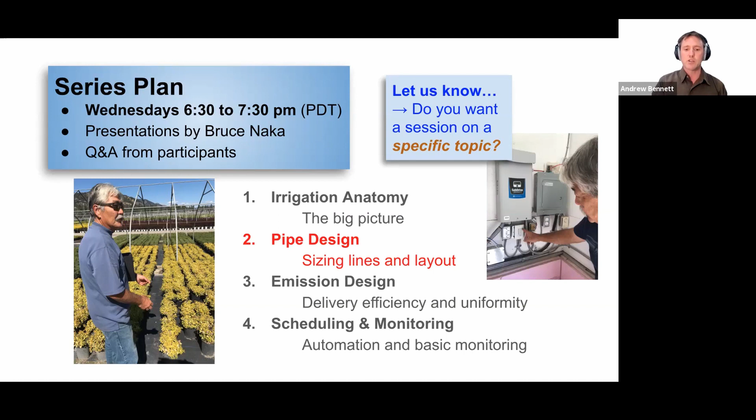Today we're really focusing on pipe design, sizing main lines, sizing your whole system, laying out laterals, and thinking really carefully about hydraulics, how pipes work, how water flows in pipes, and the considerations you have to make to ensure a uniform distribution of water, which is what we're going to cover in the next session when we look at sprinklers and drip emitters and try to think about how to get that water evenly spread across your field.

I'm going to make one caveat before I hand it over to Bruce. There's a lot of complexity in tonight's presentation, a lot of tables, a lot of numbers. We've tried to simplify it, but there's really no simplification of some of these concepts. So if you're having any trouble at all, please don't worry. Probably lots of other people are in the same boat, so don't hesitate to ask a question or ask for clarification on any of these. Bruce is going to really walk us through it one step at a time. So over to you, Bruce. Thanks very much again for being with us tonight.

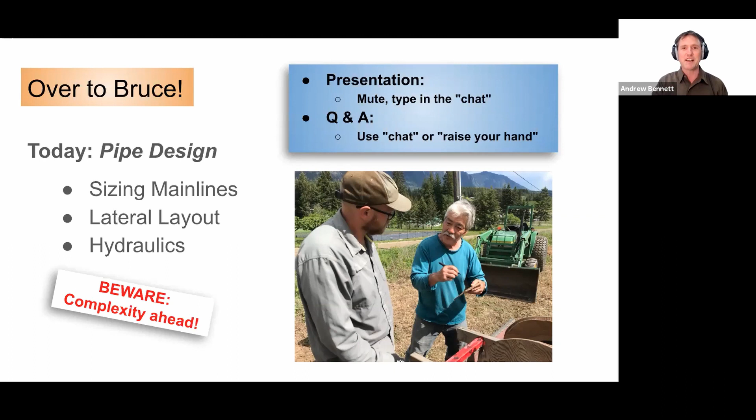Thank you very much. Thank you, Andrew.

So today's topic is about sizing of lines. It's actually sizing of all of the apparatus that you would need when you are planning your irrigation system. Obviously, your pipe sizes are one of the most relevant of these things, but we're going to discuss a lot of the different parts of your irrigation system that you should be making decisions on size for, and some of the various characteristics that you would require.

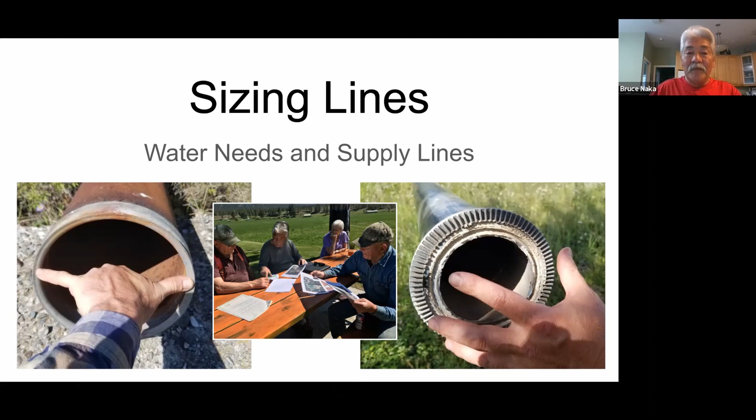We have everything at our point of connection. Obviously, if you're at a pumping system, you have to put some thought into the size of the pump that you have, and that pump cannot exceed what you have available. From that, you're going to trunk into your main line of your system, and your main line is one of the primary things we're going to be discussing today. What is the size of the main line that you're going to have? What is the type of material of the main line that you will be using? Obviously, the fittings that go along with it. And following that, we will be looking at the lateral piping, which also has to be sized.

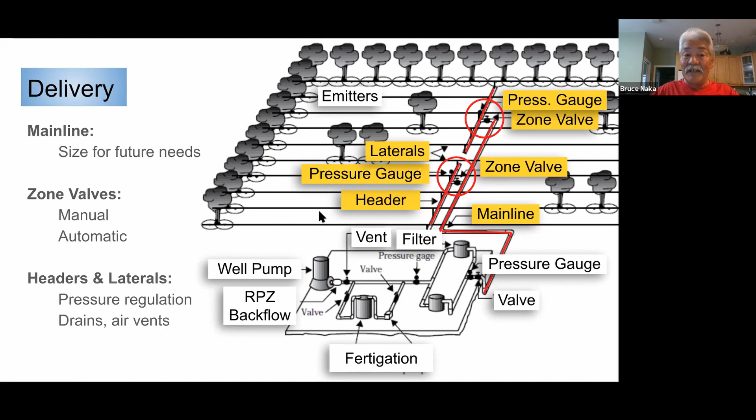It's going to tell you your peak flow demand for the area we were looking at, which was Creston. The peak ET for that area is 5.5 millimeters, or 0.22 inches per day. So that's the amount of volume we're going to need for water, 5.5 gallons per minute per acre. Depending on the size of acreage you have, you would multiply that. If you had 10 acres, you would be allowed 55 gallons per minute of water.

We also want to look at various other things besides the size of the field. We're going to look at what your crop is, since various crops have various water requirements. We want you to be able to change crops and still have enough water to facilitate irrigating it. Climate change obviously has an impact, and we want to talk about future expansions and how that will impact you too.

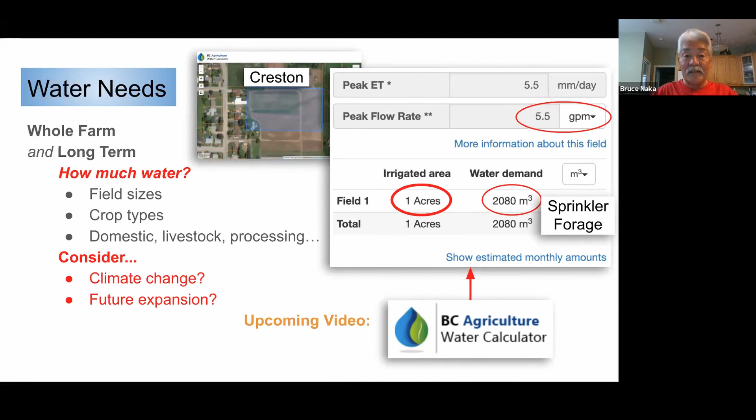So on the slide before, we had the factor of 5.5 gallons per minute per acre. On that 10 acres, he would be allowed 55 gallons per minute of water. If he's only going to be irrigating 5 acres, then he's only going to be requiring half of that amount of water, or 27.5 gallons per minute.

So one of the first things you have to do is have some long-term thinking on this. If you have 10 acres of water available, and in your mind you don't think you'll ever exceed the 5, is it wise to just size that mainline for the 27.5 gallons per minute? Or should you keep the 55 in mind? Even though pipe has gone up significantly lately because of our world situation, it's still relatively inexpensive in the scope of things. So the difference between a 2.5 or 2-inch pipe versus a 1.5-inch pipe is not that significant, and the long-term value of increasing that size is well worth your while. You'll thank yourself someday way down the road.

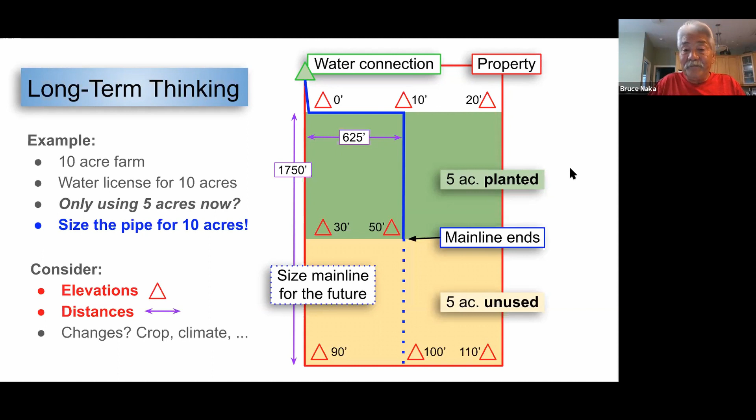So the complexity in a situation like this is you have to look at wherever your water source is coming from, and how many acres maximum you're going to irrigate. The next thing you look at is whether you're going to be irrigating in a lot of different areas at one given time, or if all the water is going to go to one specific point. In other words, in this big picture, if we had 100 acres of land and were using that 5.5 per acre, you would have 550 gallons per minute of water.

Well, the size of the piping that you would require to have that 550 gallons per minute at the very end of the field would have to be large enough to facilitate that. So we would be talking about an 8-inch main line in order to get the water to that point. However, if you were feeding from a given location and then split, using half the water on either side, you would be able to reduce the size, and may be using some 6 and 4-inch piping, for example.

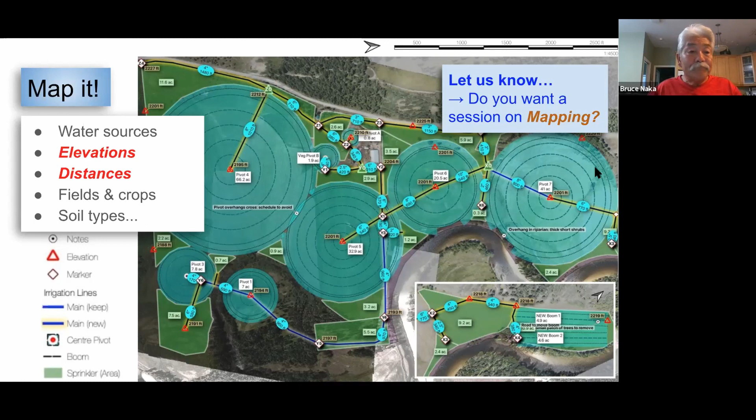Engineering specifications on a majority of piping should not exceed 5 feet per second. Why? When you exceed 5 feet per second of volume going through a pipe, you create a situation where, if you've heard of water hammer or water surging, those things occur when water changes direction. When water is going in one direction and a valve closes quickly, it can go back 2.5 times as fast in the other direction. So we want to keep our velocities under 5 feet per second. There are charts that will show you what your various velocities are in the piping, and that's going to be our governor to determine the size of the piping we're going to use.

Obviously, you have friction loss in that pipe, caused by the water movement through it. So the diameter of the pipe and the type of pipe are important. There were old slide rules, when I started out in this business, and we had to dial in the coefficient of roughness of the pipe. Obviously, if you had an old steel pipe, perhaps rusted, the water is not going to be able to flow all that smoothly through it.

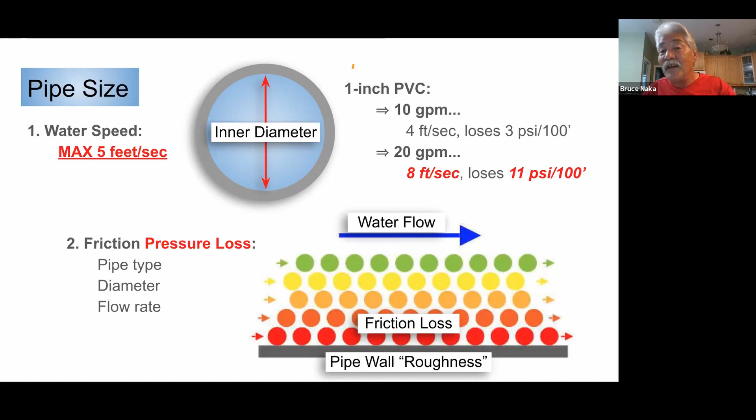An example: the inner diameter of a 1-inch piece of PVC pipe, schedule 40, if you were flowing 10 gallons per minute of water through it, you have a velocity of 4 feet per second and a pressure loss of 3 pounds per 100 feet. You'll see that on a chart in a few slides. If you were to go to 20 gallons per minute, your velocity is 8 feet per second. So you should be looking at upsizing your pipe to maybe 1.25 inches because of that velocity. You're losing 11 pounds versus the 3 at 10 gallons per minute. Next slide.

Now you're going to see pressure ratings. All piping have pressure ratings. It gets confusing on PVC pipe, for example, because you can buy anything from a class 63 pound, which you don't see. That's usually just for water transfer in a very low situation.

Your wall thickness is very minimal, to a class 125, 160, and 200. For the difference in pricing, a majority of piping that we use today would be of the class 200 variety. In days past, people used to use class 125 and 160, but the difference in cost for that extra bit of meat that you're going to get in a class 200 pipe warrants keeping it that way.

The burst pressure, which is important because you shouldn't be anywhere near it, you can see burst pressures on that pipe. So if a pipe is rated at 200 pounds of pressure, it's going to have a minimum of 1.5 to 2 times that before it'll burst. But we don't want to ever get into that situation.

So class 200 pipe, you can know that it can safely operate up to 200 psi, but keep in mind that water hammer - if it's 2.5 times going back the other way, your 200 pounds of pressure would be over 400. So keep that in mind.

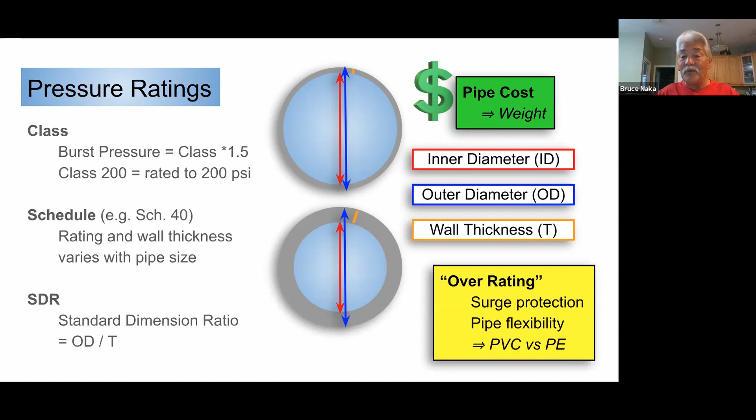Okay, so the water hammer that we're talking about - how does that happen? When a valve closes too quickly. In a lot of electric systems, there are relatively fast closing valves. There are ways around it. You can get some valves that are slower closing, but inherently, an electric valve is going to be a lot quicker closing than, say, a gate valve or a ball valve.

Ball valves actually, on a main shutoff, I do caution people about using them because a lot of people think it's awesome that you just got to quickly turn a big handle and your water's on and off. But you're creating a water hammer by doing such. And I've seen pipes blow apart very quickly by doing that in high pressure situations. Water rebounds fast, 2.44 to 2.5 times. So here you can depict that where you show the valve open, and depending on how quickly you close that valve is going to create a water hammer.

So a valve on a mainline, an isolation manual valve, there are some benefits to having to turn a handle on a gate valve because it's going to be a lot slower closing valve.

If you're using a valve to throttle, and I did go over this at other times, gate valves should not be throttled. Why? Because a gate valve throttled is going to prematurely wear your seat out on your valve, especially if you have some turbidity in your water, you have some sand and grit. It's going to break down your seat. When a seat goes in a valve, you could change all the gates you want to, but it's still not going to shut properly. If you want to throttle a valve, best valve for that is a globe valve. The ball valve will work for throttling, but the globe is the one that is specific for that purpose.

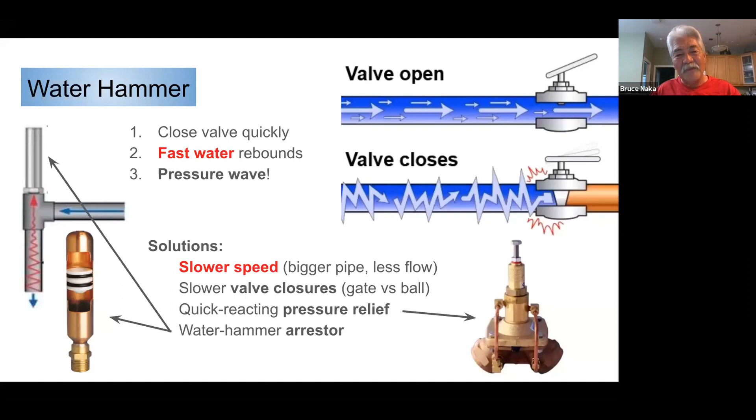You can get some other arresters that are shown here. They go online, and it's going to just take the buffer of that. In irrigation systems, you don't often see them. They're used more in smaller systems a lot of the time, in basements, houses, and the like.

Okay, next slide. Just some other items I wanted to talk about a little bit on a main line. We've discussed a lot about air relief valves, and it's only over the last 20 years or so that air relief valves have been consistently put into irrigation systems. Prior to that, they weren't put in, and there was a lot of damaged pipes that were created by the air that had built up in the pipes.

Every high point as you change your elevations, you should have an air relief valve on a system, and every 1,000 feet as a rule of thumb is a good idea to have a relief valve or an air release valve. Drain valves on the low points of your main line are going to ensure that your water evacuates out at those points. Any lower pockets, even if you drain it, water can collect in those points. And if more than half of that pipe is full of water at that low point, it's going to break. So that's a great place to put a drain.

Drain valves, if they're really deep down on the ground, you need a method to get at it. The one on the left is an expensive valve. It's a T-handle valve, but you can get a curb rod that goes onto that, so they're a lot easier to get at, to use as a drain valve. With a gate valve, you can make a very simple two-prong type of key that'll open those under deeper applications. Ball valves are a little bit more of a challenge.

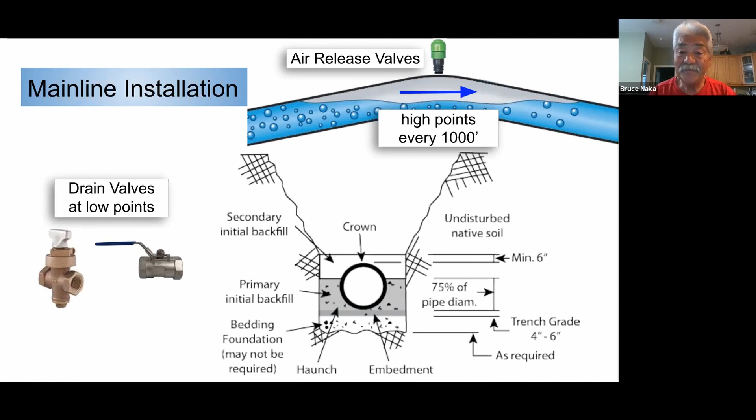Okay, I talked about boring you with some friction loss charts. Here's how we're going to determine the size of this piping system. So it's the farm in Creston, still 10 acres, with a 5.5 gallons per minute per acre allotment. So that's 55 gallons per minute, the amount of water we're going to be sizing their piping system up to. If you were to look at this chart, a 2-inch pipe—

Now you have to be very careful—this is where it's going to get a little bit confusing. I suggested that in piping on a main line, I would recommend a class 200 or a schedule 40 pipe. A 160 could be acceptable if you had 100 pounds of pressure, but I would still probably recommend going to 200-pound pipe. Based on that, the wall thickness on a schedule 40 pipe—keep in mind your OD, your outside diameter, of all PVC pipes and HDPE pipes are always consistent.

A 2-inch pipe, for example, has an outside diameter of 2.38 inches, and that's consistent. But what changes is your inside diameter. For example, that Class 160 or Class 200 pipe has a wall thickness substantially less than a Schedule 40 or up to a Schedule 80 pipe. So the thicker the wall, your outside diameter stays the same, but it means your inside diameter is going to get smaller.

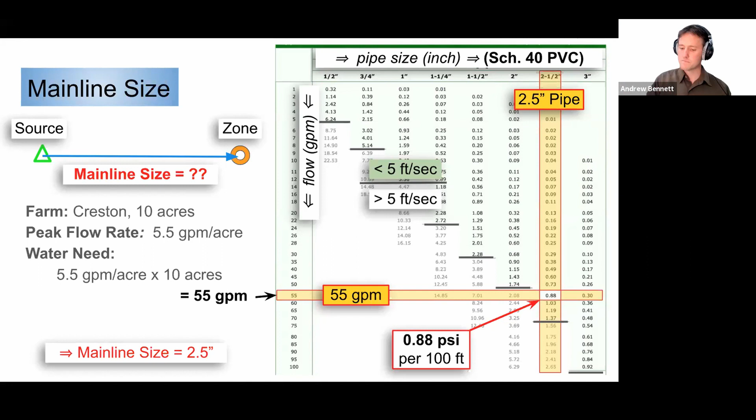But if we're in a situation where we can't afford to lose any pressure, because let's say we need 50 pounds at the end of the line, and we have friction loss, maybe other losses in fittings and the like, then you might want to go to a larger pipe so you don't lose that extra pressure. Let's say you needed 50 pounds of pressure at the end of the line but only had 55 to begin with, and it's flat or going uphill. If it's going uphill, there's nothing you can do about it. But if it was flat, depending on how long that line is, you may lose more pressure than you can afford, and so you wouldn't have the 50 pounds at the end. Hence, you go to the 2.5-inch pipe, and you're able to gain that pressure back.

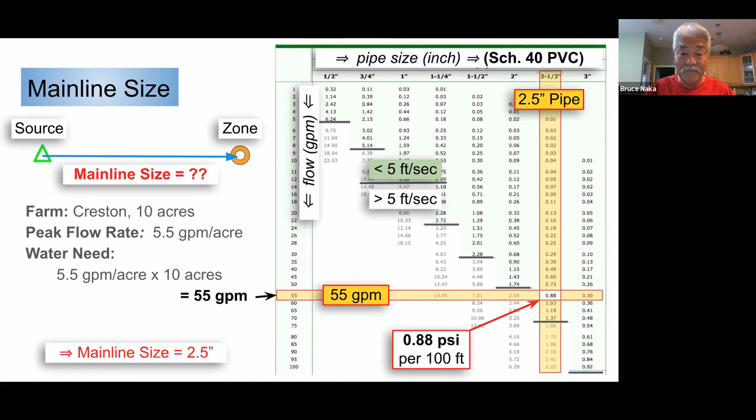Now, this is a myth, and I've heard it a lot—we heard it on our Kootenai trip quite often. That's the fallacy that people think if you put your thumb over the end of a piece of hose, you're creating more pressure. You're creating more velocity and water speed, but you're not creating more pressure.

The fact is that pressure loss occurs from friction, and the longer the distance you have and the smaller the hose, the more friction you have. If you have a larger piece of pipe, you can have less friction loss. The volume may not be as fast because it has a larger pipe to travel in, but we're not going to be losing the pressure. So slower water means less friction loss with the same flow and the same pressure, while faster water means more friction loss—that's where you get the velocity, like a Venturi effect. That's why it seems like the pressure is heavier, but it isn't.

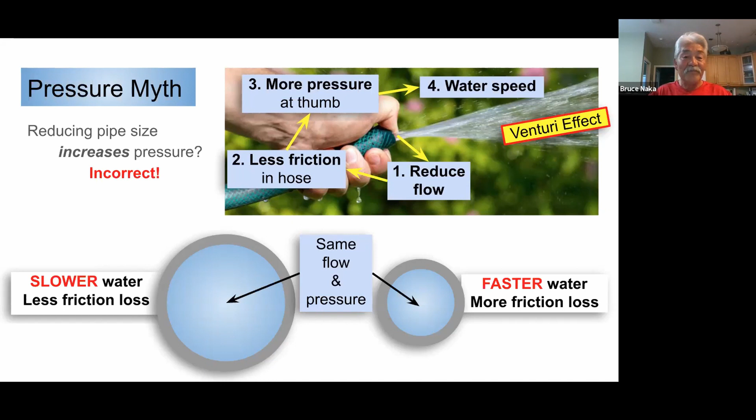Okay, now I want to go over this. Here we're sizing out a main line. We have a flow in the main line required of 55 gallons per minute. At that valve, we require 50 pounds of pressure, 49.5 it says here. At the source, we have 60 pounds, so we have 10.5 pounds of pressure variance between the source and our zone valve. The lineal distance of the line we're going to be putting in is 1,000 feet. We said in this case we're going to use a 2.5-inch diameter pipe, and elevation is 500.

What does that mean? It means that you're in a level terrain. We have 500 feet at each location above sea level, so there's zero rise or drop in elevation.

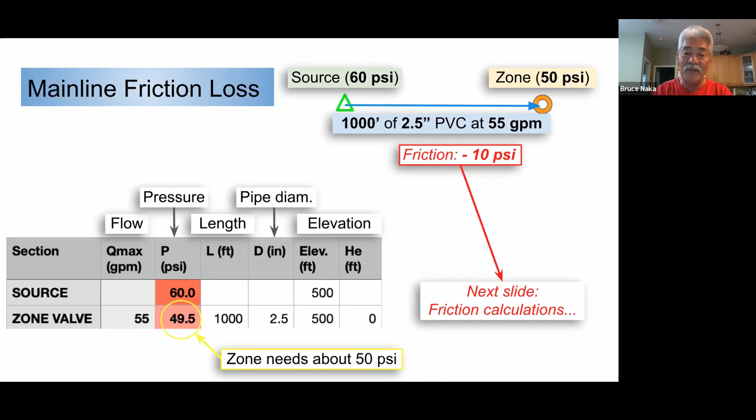So the next slide is going to look at friction losses. At 55 gallons per minute at our source, over the 1,000 feet, using the 2.5-inch pipe with zero elevation change, we have a friction loss of 0.88 pounds per 100 feet of pipe in 2.5-inch pipe.

We had 1,000 feet, so if it was 0.88 per 100 feet times 10, that gives you your loss in 1,000 feet. So we're going to lose 8.8 pounds of pressure in that pipe over the 1,000 feet of distance. Fitting loss, this is...

20 to 25% is the maximum people will use for that. On average, I usually look at a factor of around 15%. It's a gut feeling you have on that, but it's based on the amount of fittings. If you have a whole series of elbows and T's on a line, but especially 90-degree elbows, or a lot of brass gate valves on the line, we might be looking at a 20% fitting factor. But if it's a straight line with very few fittings, you might only have a 10 to 15% factor. It's always good to err on the high side. So I would say the 20% is a good judgment figure there.

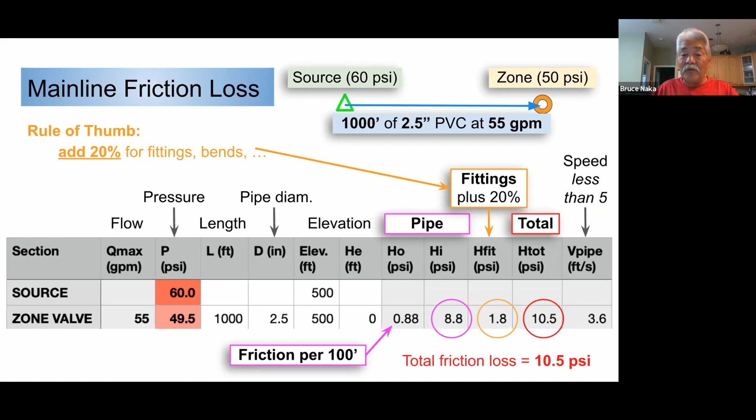So what we're going to do is take the 20% of the 8.8 pounds of loss of the main line, and that gives you 1.8 pounds of loss. Then you have your 8.8 pounds that you're losing in that 1,000 feet, so you have a total loss of 10.5 pounds. The velocity of that 2.5-inch pipe at 55 gallons per minute is 3.6, so far under our 5 feet per second limit. And we're going to have a total friction loss of 10.5 pounds.

So in that case, the 10.5 pounds that we were losing off of that 60 that was there, we were at 49.5 psi.

Now we're going to throw another monkey wrench in here. We're going to put some elevation change in here. So from our source of water to where our zone valve is, we now have a 50-foot rise in elevation. What does that mean? It means we're going to have an extra 50 feet of lift that we have to overcome, so we're going to be losing more pressure because of that extra lift. That extra lift is going to cost us an extra 22 pounds. So what that means is from your source, you would actually need 82 pounds in order to give you the 49.8 pounds at your zone valve.

How I usually suggest working out friction losses is the same way we calculate the size of a pump. We start at our source and we calculate out all our friction losses, all our elevation changes, all of our losses that occur in the line over that distance.

And then we determine at the very end of the line, if we're running a wheel move, a traveling gun, or a solid set sprinkler system, what does that last sprinkler head on that zone require to operate properly? If it's a brass impact sprinkler head, 3/4 inch, you probably want about 40 pounds of pressure.

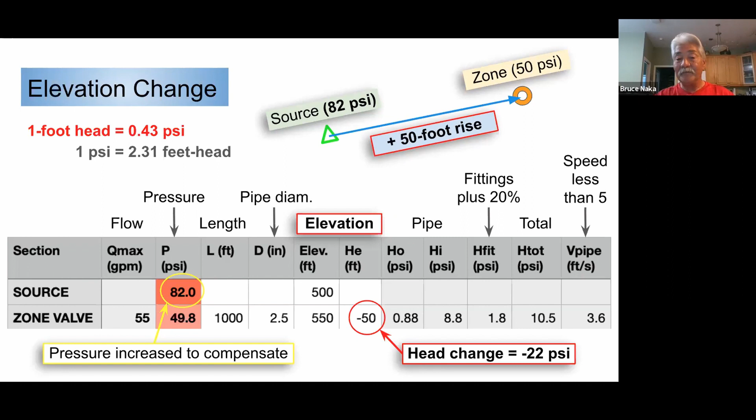Next slide, please. Okay.

So here we have various layouts of piping systems that you should have on your irrigation system, how your laterals run. The best, most efficient method of piping a system is equal distribution, feeding from a center point, minimizing the length of your lateral lines. So in example 1, we are feeding from our valve location, and we're feeding 8 sprinkler heads all in a row. It could make a turn and go in a different direction, but we're going to just have one line with all our heads in a row.

So we're going to have heads, whatever the flow of each of these heads is going to be, as we go down the line. So at this point here, let's say those heads were 5 gallons per minute.

We would have 5 gallons per minute to sprinkler number 1, 10 at number 2, and so on until we hit number 8, which in that case would have 40 gallons per minute of water. So we would have to size our pipe based on 40 gallons per minute at the beginning of the line, reducing the size of that pipe possibly all the way down to the size you would require at head number 8, which could be 3/4 inch.

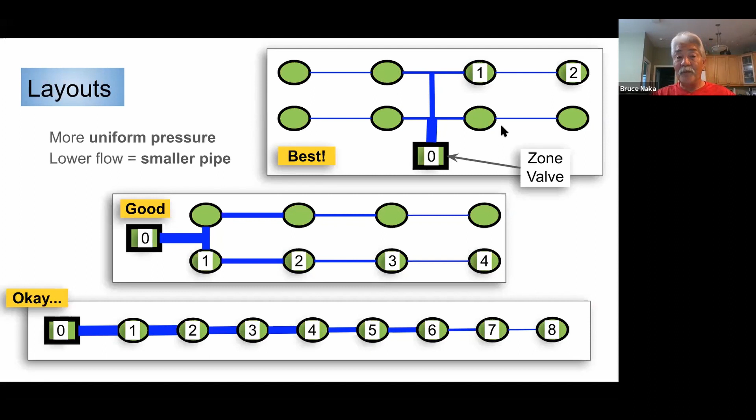Okay, lateral friction loss. So here we're going along, and look at that - it's the 5 gallons per minute we were talking about in the 40 gallons per minute example. So this is going to show you how you would size each of your pipes out, looking at your friction losses.

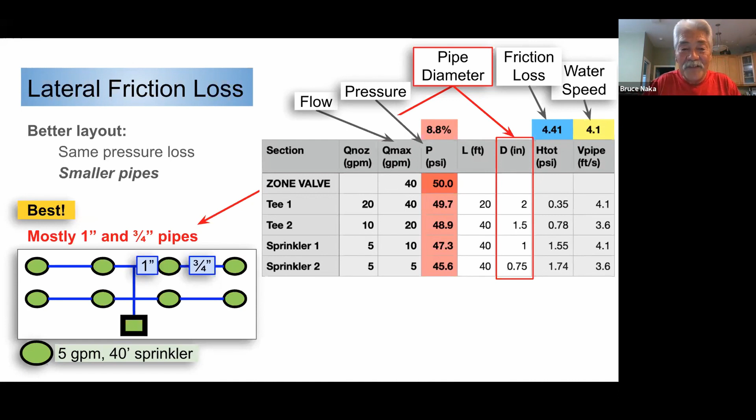This is the best option. So it just goes to show that there are a couple methods that can make a system work better and save you some money too.

Okay, looped pipes. Loop pipes have the benefit of... a lot of times the loops are done as a band-aid. Why is it a band-aid? It's because the main line was put in too small, maybe on one side, and then if you were to join the pipe up from another side, you can loop a main line. So if you have one specific location where your water is flowing from, you tee from it, and you pipe around the perimeter of an area, you could use smaller piping.

Why? Because the piping is looped, so the water is flowing in both directions to that one point, and with the loop system, when you calculate out your losses, you're looking at half the flow to half the distance. So a loop system, the benefit of it is at any given place, not other than elevation in a flat field, you're going to have fairly equal pressure because it's being fed from both sides.

Loop system, very popular, used a lot in golf courses, large commercial fields, agricultural large projects are done that way, because you need different mains feeding from different areas in an agricultural project. So if you have an issue on one part of your main, you could isolate that out and get the water to it through the loop from a different direction.

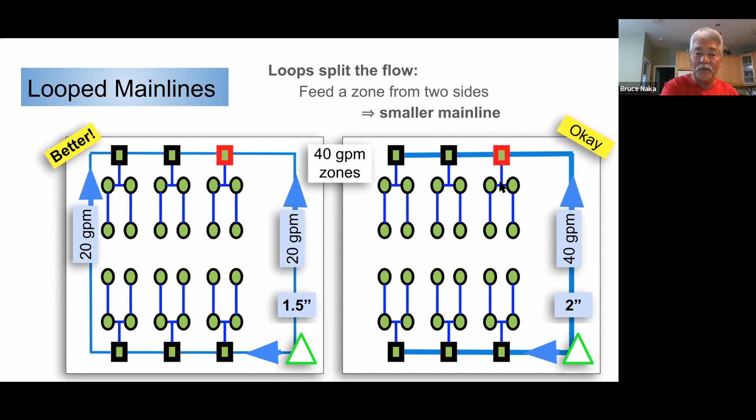And in this case here, we're looking at a looping, where we're feeding from one direction or feeding from two directions. So in this way here, we're feeding 40 gallons per minute all the way up. But if we were able to feed the water in both directions, you could minimize the flow going in any given place. It isn't always the best thing to loop a system.

Like I said, a lot of times, in a lot of circumstances in a loop system, you are looking at joining two pipes together that are going around the perimeter of an area. If the pipes are presently located that way, it isn't a bad idea to loop the main line to equalize the pressure. But if you were starting out from scratch with the piping, the central feed is still your best way to feed.

You can see in this system here, we have a main line through the middle. The main line will be large enough to facilitate the 40 gallons per minute, and all of your lateral lines are going to be feeding off from the middle, so you're not going to have that extra piping that you would be putting in the loop system. Everything is going to be a good even distribution, all fed from the middle. So loops aren't always the answer, but there are times and places for it.

One last thing I did want to mention about looping of a system is in circumstances on an electric system, for example, where you may have fast closing valves. Keep in mind that at any given point on a loop, you have water flowing from both directions, and the piping, if it is too small for a system...

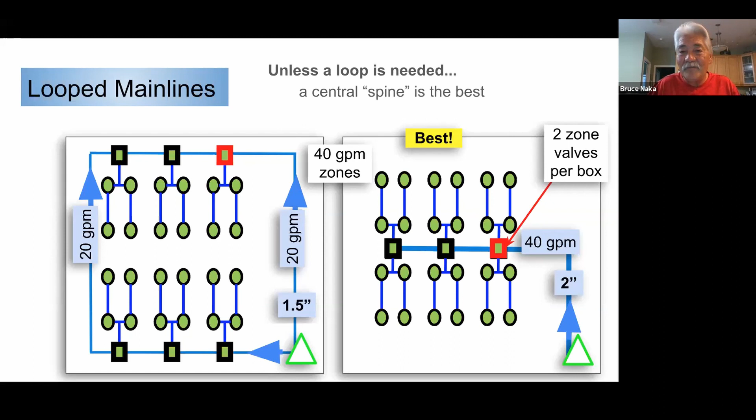But if you have a water hammer at any given point, because of the smaller pipe, if you have that volume of water being fed from either way, there is better opportunity for that pipe to incur some serious hammers and surges in it. So I just wanted to point that out.

A lot of times what people will do is say, okay, from here I'm going to run 2-inch pipe in either direction because I'm feeding from the middle. It's only 50 gallons per minute going either way, so the 2-inch T would allow me to go to 2-inch either side. Wrong. And I see this happen so many times. Where you're going to get the most hammer and surging on a system is at an intersection such as a T or an elbow.

We want to equally distribute the water, 100 gallons per minute. You always want to put that through a large enough T to facilitate that entire flow. I realize this T is an intersection and half the flow is going either way, but that volume of water pounding down on the bottom of that T is 100 gallons per minute. If you had a 2-inch T, which I've seen so many times, that's undersized at that point. You have a hammer through a smaller opening that's going to cause you a challenge, a lot of broken pipes and fittings. If you put a 3-inch T in and bush it down to 2-inch on either side, you have the volume to facilitate this, with the reduction to 2-inch happening after we've cleared the T.

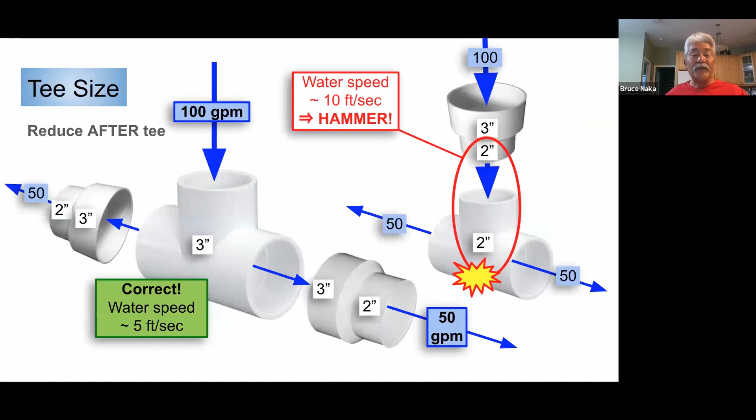On one picture, back one please Andrew. The one issue I didn't point out here that you do see in valves above ground is a lot of times, because you have a rise coming up, and depending on if you have too much of a rise coming up to your valve locations, sometimes you're going to be creating air locks into the system. So an air relief valve may be necessary on an above ground manifold to your valves.

In situations, we've seen this before, this is a little battery controller that you can put in on a system if you don't have wiring, or if you're retrofitting into a system. It's a good way to go.

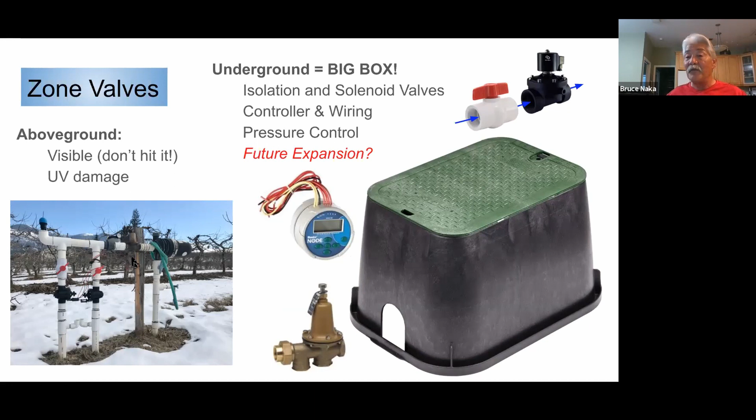Automatic pressure reducing valves at various areas of your system, where they should be. Your pressure reducing valve maybe isn't always necessarily going to be at the beginning of your system. Maybe you have a large drop in elevation, 60% of the way down your main line. That's the place you would want to have your pressure reducing valve in circumstances like that.

Okay, thank you, next one. This is just to show a couple things here.

Today I apologize for any confusion that we may have put forth with all the sizing up and down. Now I'm going to throw one more curve at you.

Electric valves, and any other size valves, a lot of times are undersized by one size over the size of your piping. Why do you do that? To save money, perhaps. The 5 feet per second rule for valves of brass or even electric valves is a lot of times cheated on a little bit. Primarily, you can do that because an electric valve, especially if you go to a glass reinforced body or a brass bodied electric valve, is going to be stronger.

The way they're built, your velocity a lot of times you'll use 7.5 feet per second for sizing on a valve. So you can go a little bit smaller on your valve. For example, let's look at that 2-inch pipe you're putting in for your main line, and your zones are building around the 2-inch pipe. You're going to have up to 60 gallons a minute, 55 to 60 gallons per minute, sizing of that pipe.